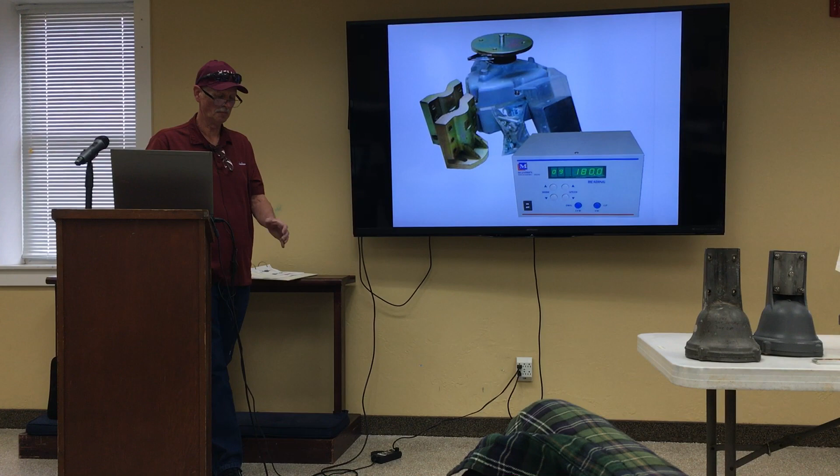Out there on YouTube, you can see guys tear one apart, showing how big the gears are, and that worm gear motor down there. Great big old thing. You can watch them tear that down real easy. So they've got a lot of rotors out there.

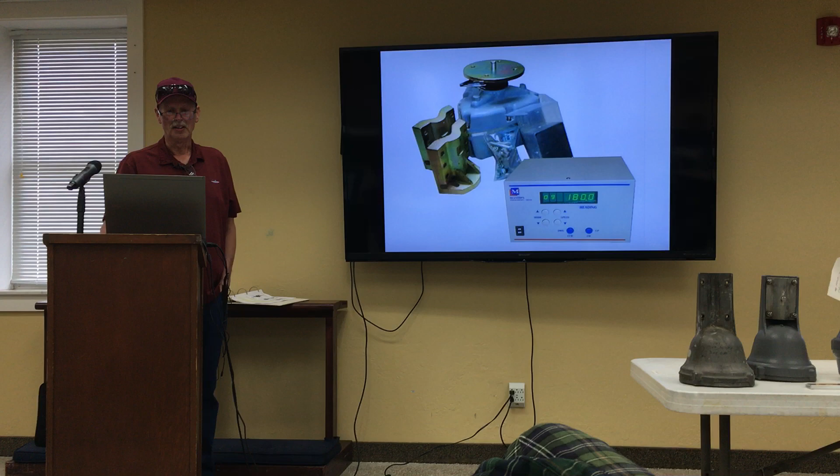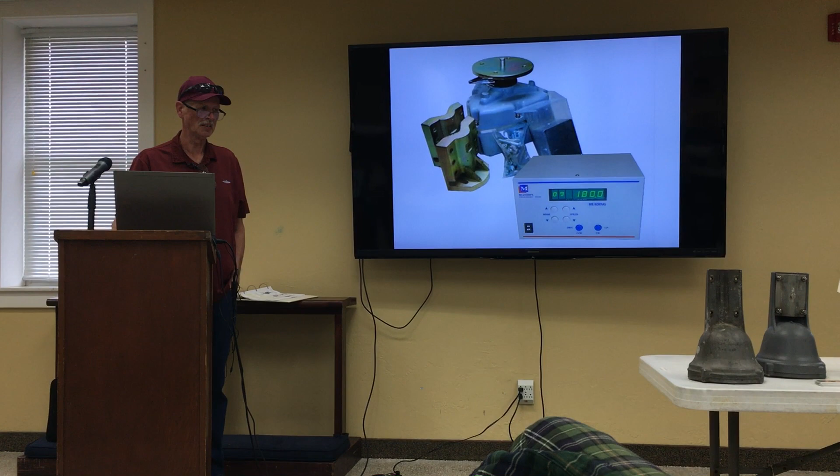I had a bunch one time here at Pryor. We had a little thing over at Pryor a couple years ago, and I had about 10 or 11 Ham M's rebuilt at that same time, all out on my table. A buddy of mine said, well, I think you could turn a house with those, as many as you got there.

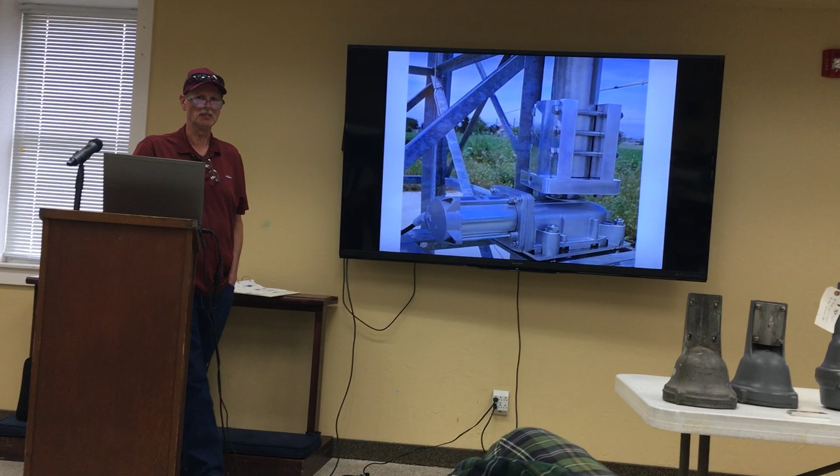So you can invest a lot of money in the rotors and towers, whatever you want, but I suggest don't try to put a tail twister in a Rohn 25 tower. It ain't going to work. There's no way. And don't cut the braces off your RON 25s to fit, because then you weaken your tower. You can take all that Z bracing off, and so you start a lot of twisting and turning, and it'll come down. I've seen it happen.

Old boy lost a guy wire on a Rohn 25 and had it up about 10 foot, and it just twisted right there at that weak point and came down.

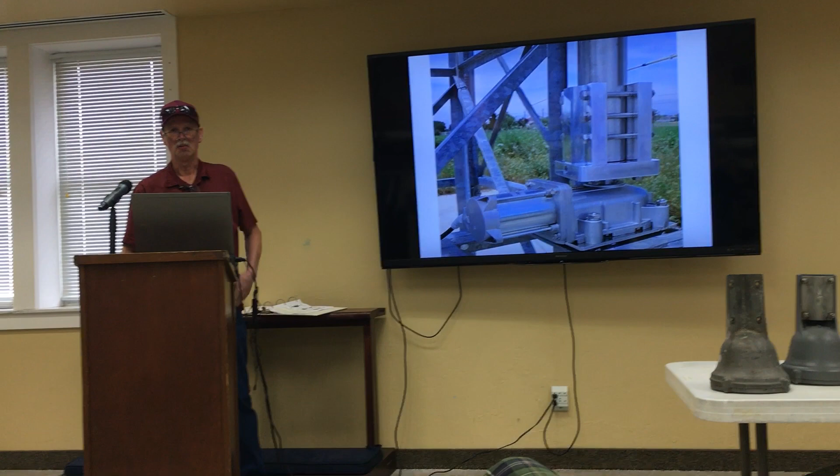A lot of people want their towers down, or rotors down below where they can work on it on the ground. Well, you got one problem. You got to make sure that whole mast going up through there is symmetrically straight. With the Rohns, you can take the rotor plates, put them down every so often with a bearing and keep it straight that way. But you got to keep that mast coming all the way down pretty well symmetrical, straight up and down, so that it'll turn right. You won't be kinking and binding in it.

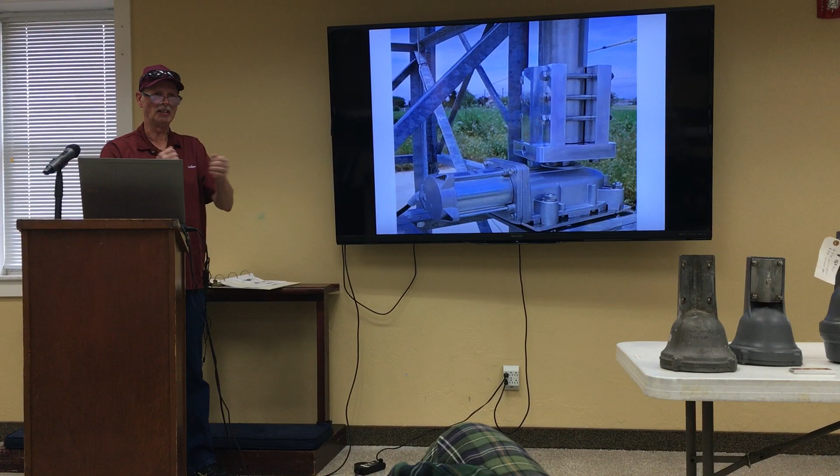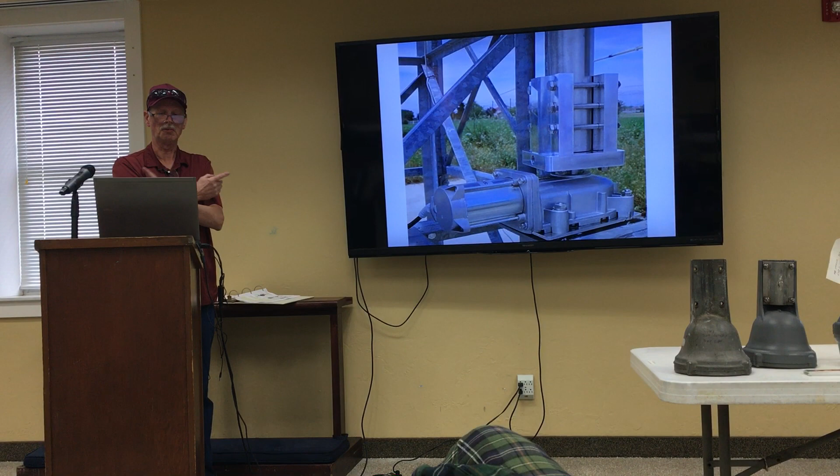So you got a little more process and thinking. When you're just setting it down there, you got to make sure it's all symmetrically straight coming down the length of that tower, so it'll turn correctly instead of bogging down trying to turn it. So you got to kind of watch that.

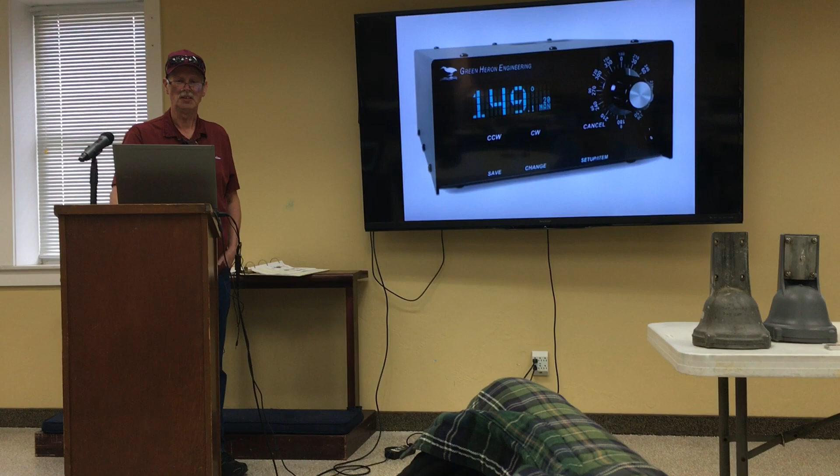Heron makes a lot of good rotor boxes and everything for different ones. I noticed Hy-Gain has started coming out with digital rotor boxes. They even make them for the Yaesus now. So you got that. I learned a long time ago, back before Yaesu come in...

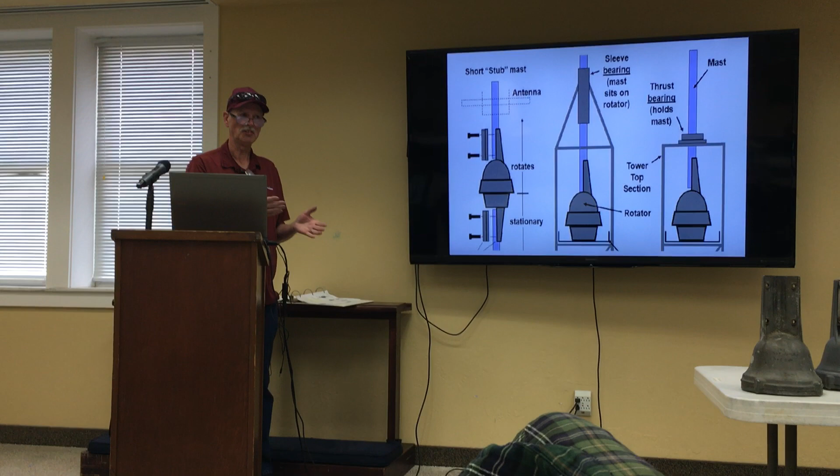Yaesu bought out Kenpro, if you ever remember, heard of Kenpro rotors. Well, Yaesu bought Kenpro out, and that's where Yaesu got started. But they told me years ago, back when I was still CBing, to stay away from that type of rotor because everything was made overseas and it was hard to get parts for it and stuff. So I don't knock Yaesu.

I've been asked if I work on them. I said nope, I just work on the Hy-Gains because Yaesu is hard to get parts for, trying to call up and get them and stuff. So that's why I've been told to stay away from that design, but people can take off and do what they want. That's their prerogative.

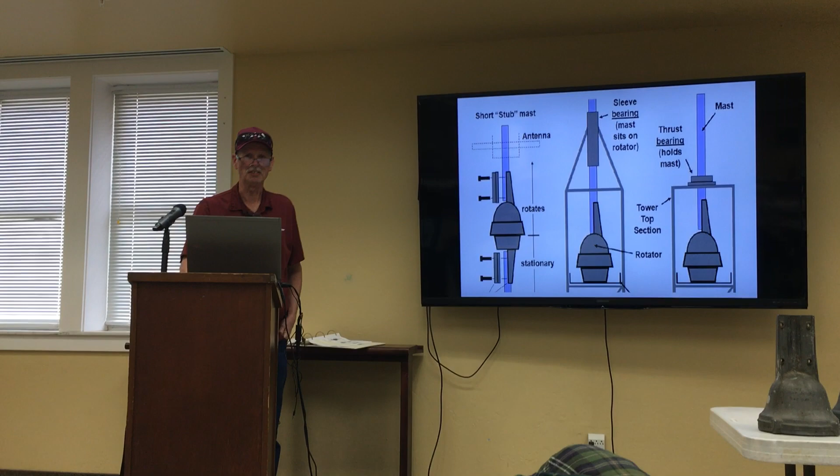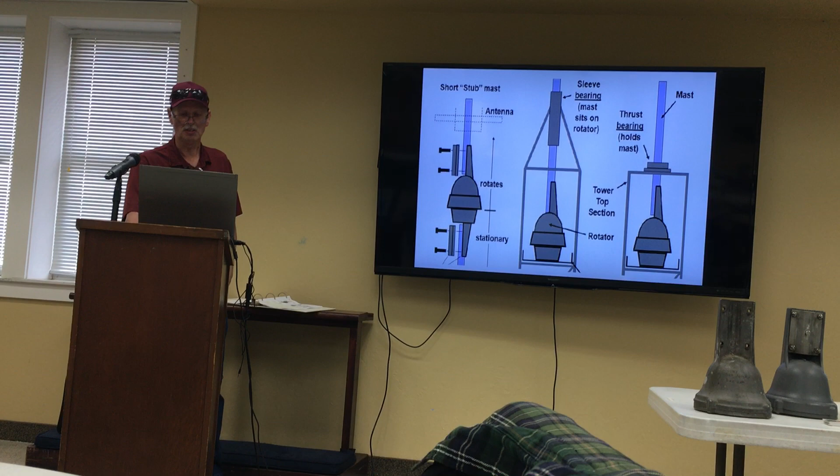So I just keep on working with Hy-Gains. I can get the parts readily, call down there and get all the parts I want all the time. So I don't have any trouble, unless, like it was here a while back, they broke a tool that made their motors. So it took me a while for them to finally get a new tool made to start getting some motors out. Now it's kind of hard for them with the motors. They changed the people they're getting the stuff from. Specs are changing, so it's hard to get their specs right and stuff. So I'm having a little bit of trouble getting motors right now, but not too much.

But that's about what I've got. Has anybody got any questions and answers?

Fred, now you talked about brakes very briefly, but how critical is a wedge brake? Real critical. I've had the Ham 3s or Ham M's sit there and turn around and just wore out the grooves inside. And what I found was, I didn't know it when it happened to mine.

I just tore that apart and used that one for parts for another. But a buddy of mine gave me one, and as I was slowly tearing it apart, there's that little latch that comes down off the wedge that holds it from coming loose. There's two springs that fit in there and butt up against the plate of the mast, where the bearing races are and the motor sets. Those two springs were gone.

So that let that thing flop up, and that's what lets them run around. But that wedge is really important, and it needs to fit in there good. I've had one where the old boy at the swap said, well, it's a Ham 4. Well, it can be converted to a Ham 4, but it had the wrong wedge in there and stuff, so I had to go back and redo all of that.

But it's easy to make them into Ham Fours. I like the Ham Four brakes, because every old Ham M I get now, everybody wants fours, so I just convert it over to a four. There's just about three parts to change, and I can go from an old Ham M to a Four real quick.